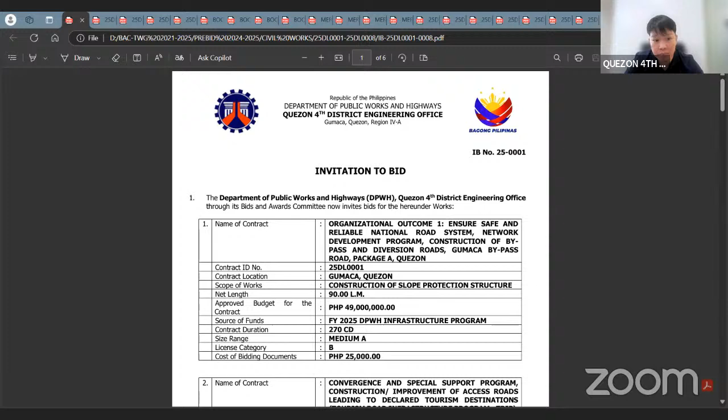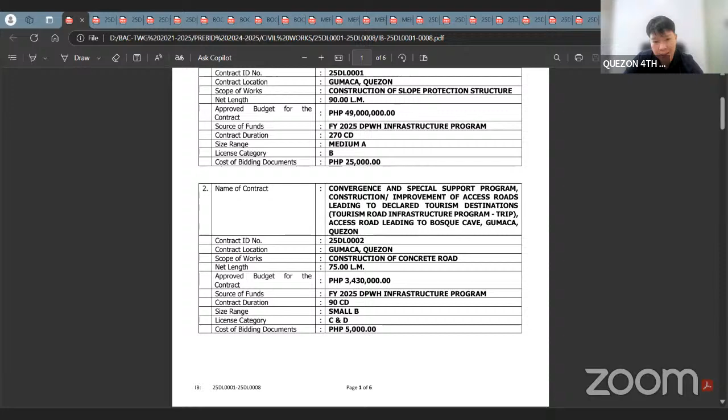For second project, 25DL0002, Convergence Special Support Programs, Construction Improvement Access Road leading to declared tourism destinations, Tourism Road Infrastructure Program Trip, Access Road leading to Bosque Cave, Gumaca, Quezon. Scope of work po natin is construction concrete road, length of 75 linear meters, approved budget for the contract of 3,430,000 pesos. Source of fund, FY 2025 DPWH Infrastructure Program, duration of 90 calendar days, size range small b, license category C and D, and cost of bidding document of 5,000 pesos.

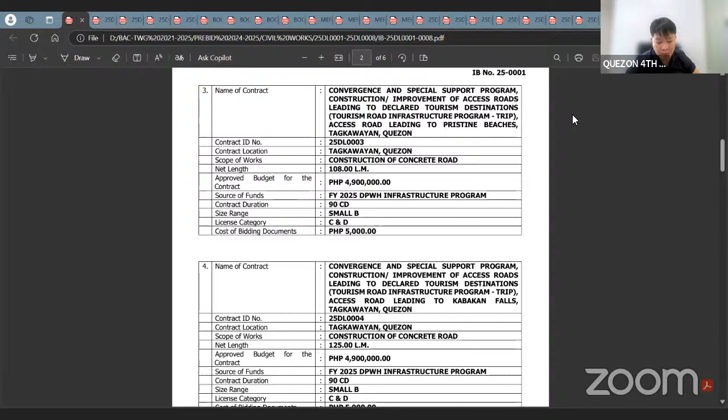Third project, Contract ID 25DL0003, Convergence Special Support Program, Construction Improvement Access Roads leading to declared tourism destinations, Tourism Road Infrastructure Program Trip, Access Road leading to pristine beaches, Tagkawayan, Quezon. Scope of work po natin is construction concrete road, length of 108 linear meters, approved budget for the contract of 4,900,000 pesos. Source of fund, FY 2025 DPWH Infrastructure Program, duration of 90 calendar days, size range small b, license category C and D, and cost of bidding document of 5,000 pesos.

Number 4, Contract ID 25DL0004, Convergence and Special Support Program, Construction Improvement of Access Road leading to declared tourism destinations, Tourism Road Infrastructure Program Trip, Access Road leading to Kabakan, Kabakan Falls, Tagkawayan, Quezon. Length of 125 linear meters, approved for the contract of 4,900,000 pesos. Source of fund, FY 2025 DPWH Infrastructure Program, size range small b. Contract duration po natin is 90 calendar days. License category C and D, and cost of bidding document of 5,000 pesos.

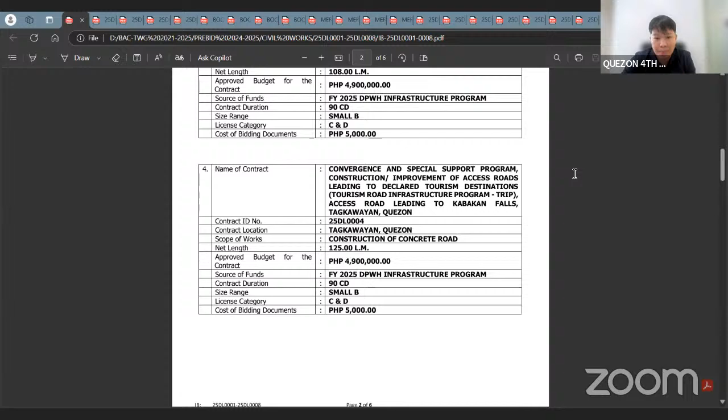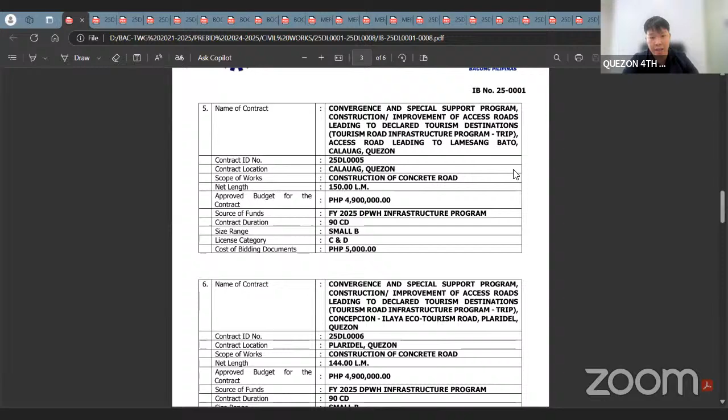Next, fifth project, contract ID 25DL0005, Convergence Special Support Program, construction improvement of access roads leading to declared tourism destinations, Tourism Road Infrastructure Program Trip, access road leading to Lamesang Bato, Calauag, Quezon. Location: Calauag, Quezon, scope of work: construction concrete road, length of 150 linear meters, approved budget for the contract of 4,900,000 pesos. Source of fund, FY 2025 DPWH Infrastructure Program, duration of 90 calendar days, size range small b, license category C and D, and cost of bidding document of 5,000 pesos.

Number 6, Contract ID 25DL0006, Convergence Special Support Program, Construction Improvement Access Roads leading to declared tourism destination, Access Road, Tourism Road Infrastructure Program Trip, Concepcion Ilaya Ecotourism Road, Plaridel, Quezon. Scope of work, construction concrete road, length of 144 linear meters, budget for the contract of 4,900,000 pesos. Source of fund, FY 2025 DPWH Infrastructure Program, duration of 90 calendar days, size range small b, license category C and D, and cost of bidding document of 5,000 pesos.

Next, number 7, Contract ID 25DL0007, Convergence Special Support Program, Basic Infrastructure Program, DIP Multipurpose Building, Facilities to Support Social Services, completion of multipurpose building, Barangay Villa Belen, Quezon. Scope of work, construction of multipurpose building, number of building 1, approved budget for the contract of 2,970,000 pesos. Source of fund, FY 2025 DPWH Infrastructure Program, duration of 120 calendar days, size range small b, license category C and D, and cost of bidding document of 5,000 pesos.

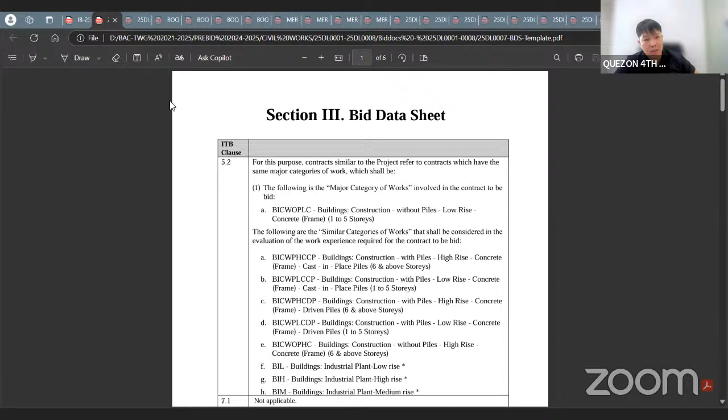Next, last contract ID 25DL0008 for the construction of bridge. For the major category support: bridge construction, concrete superstructure with cast-in-place piles. Then for the similar category support: bridge rehabilitation, concrete superstructure with cast-in-place piles; bridge retrofitting, concrete superstructure with cast-in-place piles.

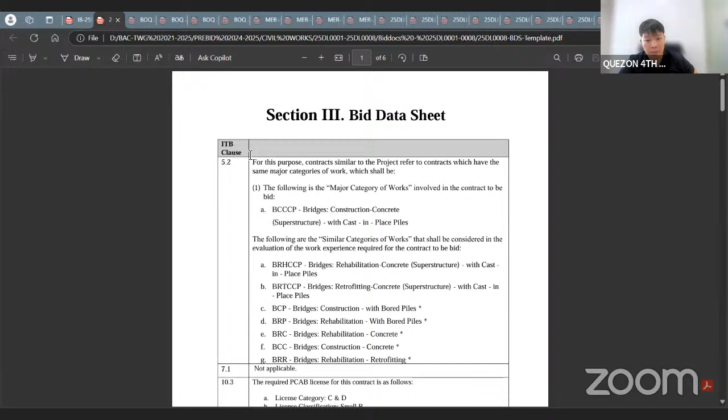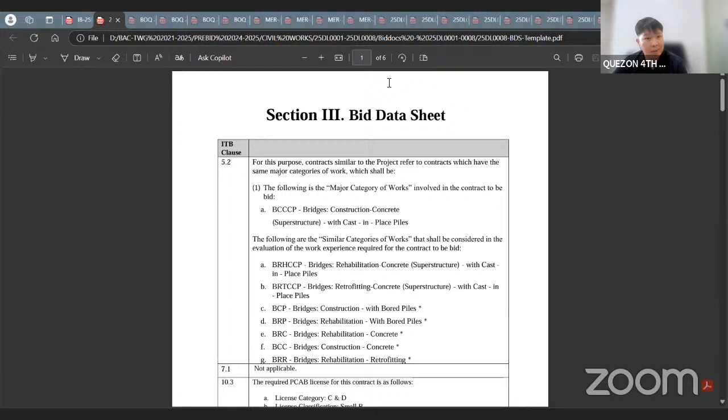Bridge construction with bored piles, bridge rehabilitation with bored piles, bridge rehabilitation concrete, bridge construction concrete, and bridge rehabilitation retrofitting. So that is for 25DL0008. Then next, let's proceed to our bill of quantities.

So for the construction slope protection structure, 25DL0001, for the summary of bid prices: Part A, facilities for the engineer; Part B, other general requirements; C, earthwork; D, sub-base course; then E for the surface course; G, drainage and slope protection structure; and Part LB-B, bank and slope protection works.

So for Part A, we have facilities for the engineer: provision of field office on an incidental basis, provision of furnitures, fixtures, equipment, and appliances for the field office for the engineer, provision for pickup type service vehicle on an incidental basis, provision of progress photograph.

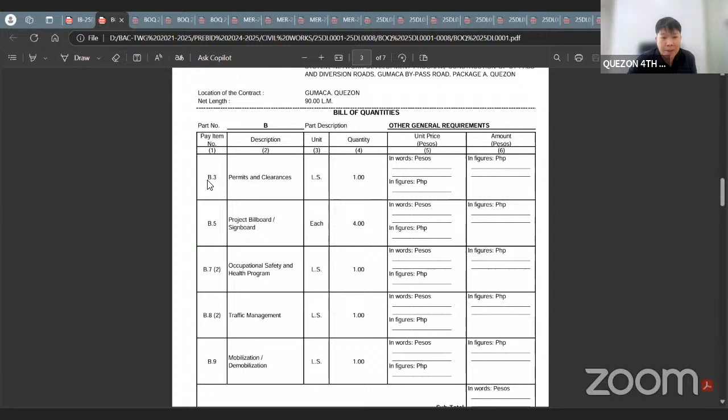Then Part B: permits and clearances, project billboard signboard, occupational safety and health program, traffic management, mobilization, and demobilization. Then for Part C, for the earthworks, we have clearing and grubbing, embankment from roadways, structure excavation common soil, embankment from borrow common soil, subgrade preparation common material. The next, Part D, sub-base course, we have aggregate sub-base course.

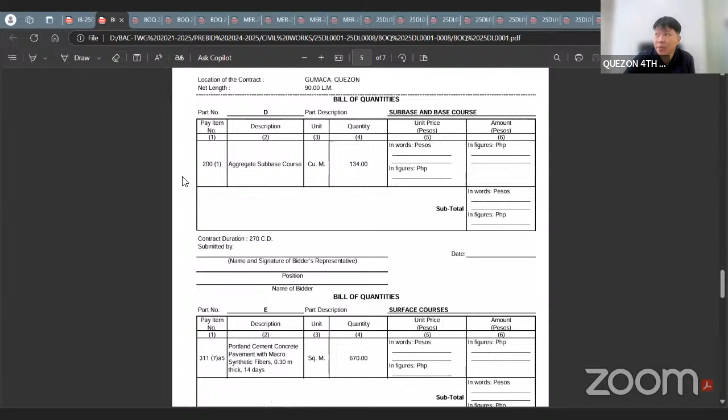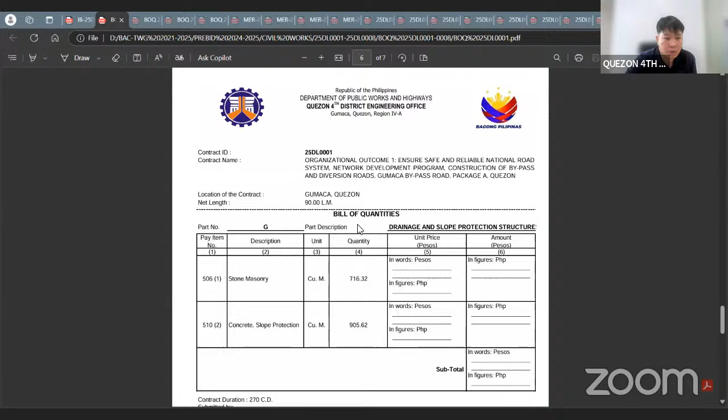Then Part E, for the surface course: Portland cement concrete pavement, macro synthetic fiber, 0.30 meter thick, 14 days. Next item, for the drainage and slope protection structure, this is our major item: Part G, stone masonry and concrete slope protection. Then for bank and slope protection works, Part LB: structural steel sheet piles furnished and structural steel sheet piles driven. So that is for contract ID 25DL0001.

Next, for the construction of concrete road, we have 5 roads. The requirements in the BOQ will be the same; they will only differ in quantity and in the length of our concrete roads.

So for our sample, 25DL0006: Part A, facilities for the engineer; Part B, other general requirements; C, earthwork; D, sub-base course; E for the surface course; and G for the drainage and slope protection structures.

So for the contract IDs 25DL0002, 25DL0003, 25DL0004, 25DL0005, and 25DL0006 — 5 constructions of concrete roads.

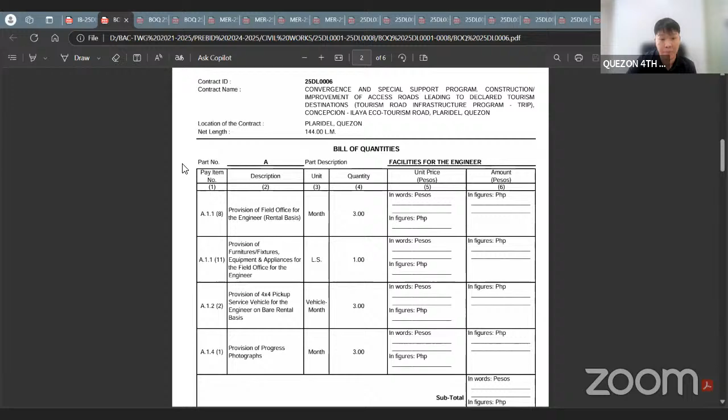For the bill of quantities, Part A, facilities for the engineer: provision of field office on a rental basis, provision of furniture, fixtures, equipment, and appliances for the field office for the engineer, and provision for pickup type service vehicle on a rental basis. Then next, provision of progress photograph.

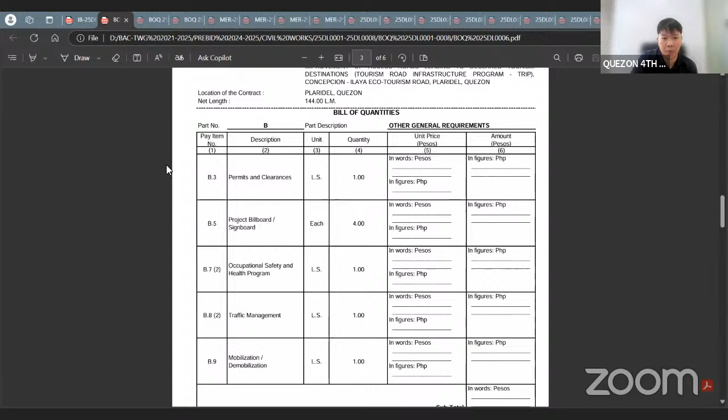Then Part B, for other general requirements: permits and clearances, project billboard signboard, occupational safety and health program, traffic management, and mobilization, demobilization. Then Part C for the earthworks: clearing, grubbing, embankment from roadway, structure excavation common soil, embankment from borrow common soil, and subgrade preparation common material.

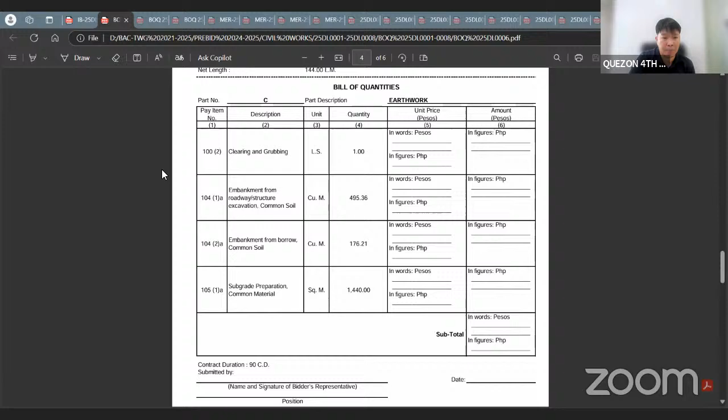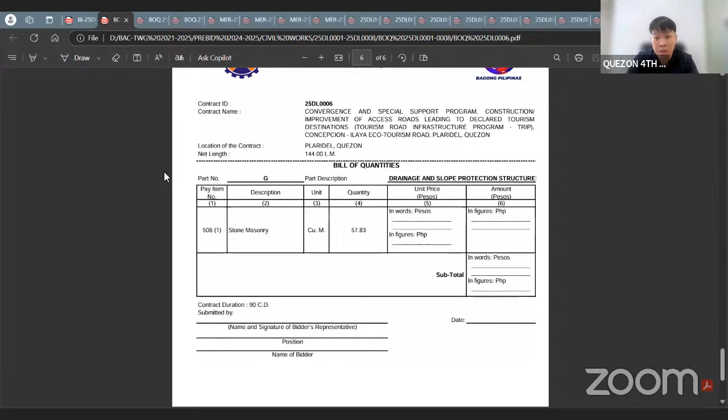Then for Part D, for the sub-base course, we have polymer stabilized sub-base surface course. Then Part E for the surface course: Portland cement concrete pavement, unreinforced, 0.23 meter thick, 14 days. As I mentioned, those 5 contract IDs will have changes in thickness as indicated per contract ID, but for our major categories, the required scope of works is the same. Then Part G for the drainage and slope protection structures, stone masonry.

Next project po tayo, for the multipurpose building, contract ID 25DL0007. For the summary bid prices: Part A, facilities for the engineer; Part B, other general requirements; Part D, reinforced concrete; and Part E, finishing and other civil works.

For Part A, we have provision of office on rental basis, provision of furniture, fixtures, equipment and appliances for the field office for the engineer, provision of 4x4 pickup type service vehicle for the engineer on rental basis, and provision of progress photograph.

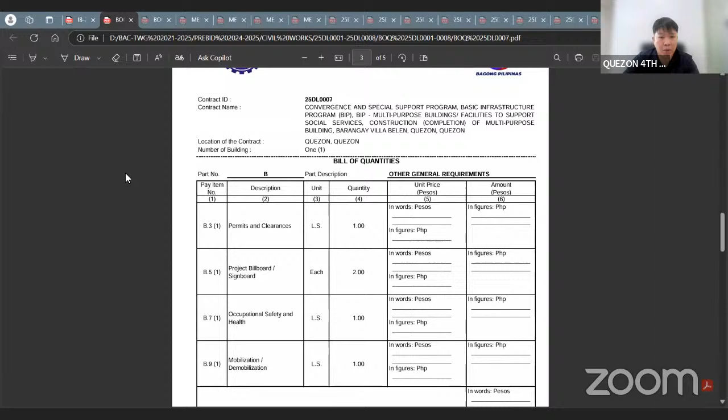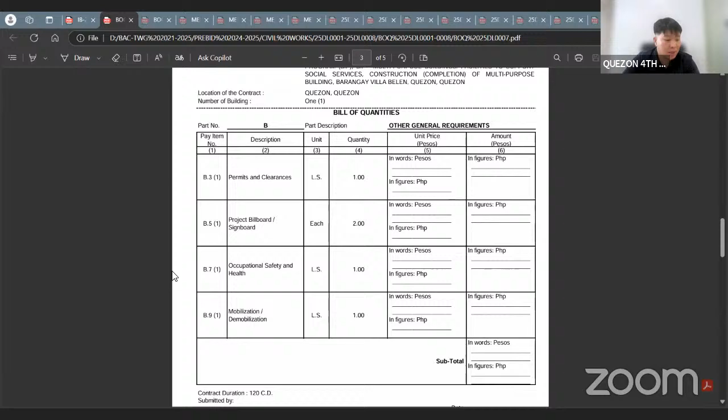For Part B, other general requirements: permits and clearances, project billboard, signboard, safety and health program, mobilization, demobilization. Then Part D for reinforced concrete, forms and falseworks.

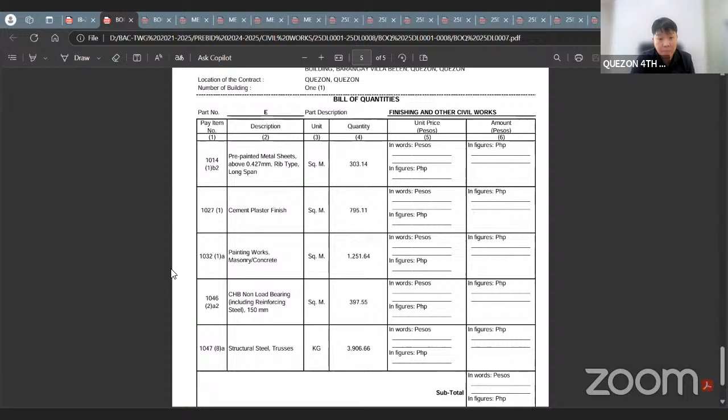Part E, finishing and other civil works: pre-painted metal sheet above 0.427mm, rib type, long span; cement plaster finish; painting works; masonry concrete; CHB non-load bearing including reinforcing steel, 150 millimeters; structural steel trusses.

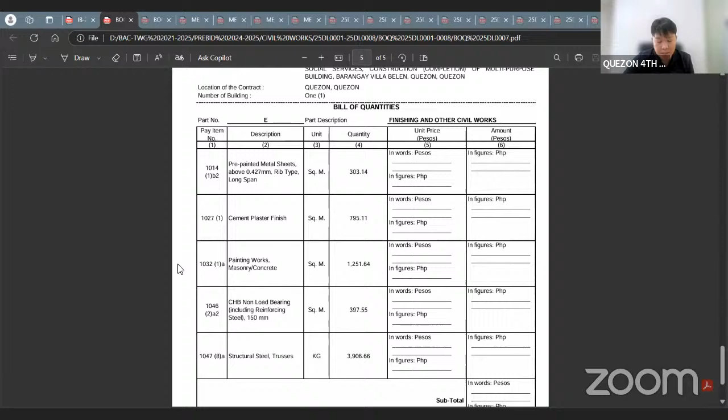So yun lang po yung ating required items for 25DL0007, construction of multipurpose building. Next.

Last project, or last contract ID natin, that is for the construction of bridge, contract ID 25DL0008. For the summary bid prices: Part A, facilities for the engineer; Part B, other general requirements; Part F for the bridge construction; and Part G for the drainage and slope protection structure.

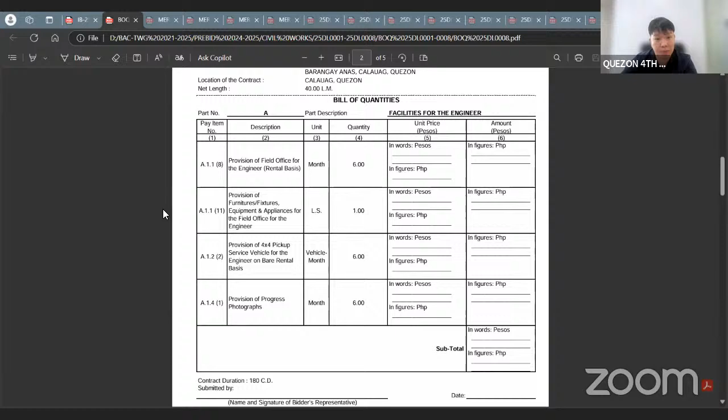Part A: provision of office on rental basis, provision of furniture, fixtures, equipment and appliances for the field office for the engineer, provision of 4x4 pickup type service vehicle on rental basis, and provision of progress photograph.

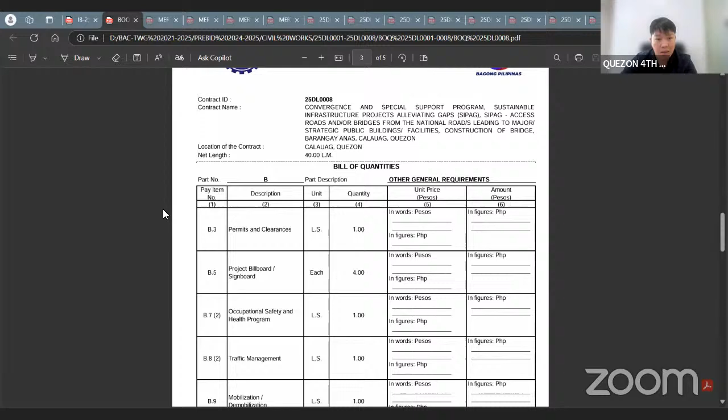Next, Part B, other general requirements: permits and clearances, project billboard, signboard, safety and health program, traffic management, mobilization, demobilization. Then Part F for the bridge construction.

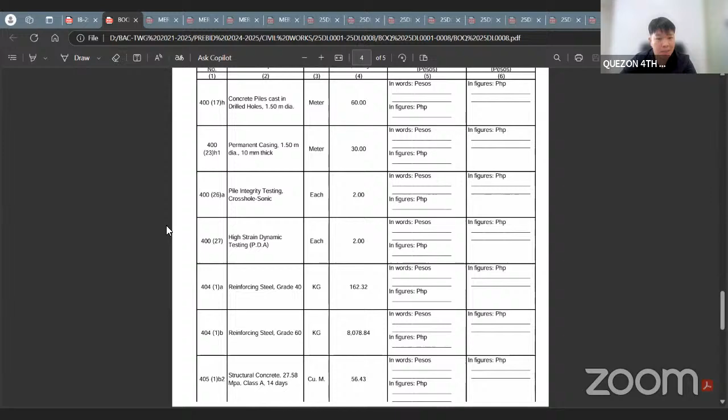Concrete pile cast in drilled holes, 1.5 meter diameter, permanent casing 1.5 meter diameter, 10 millimeter thick; pile integrity testing; cross-hole sonic logging; high strain dynamic testing (PDA); reinforcing steel grade 40; reinforcing steel grade 60; structural concrete, 27.58 megapascal, Class A, 14 days.

Then for the drainage and slope protection structure, Part G, stone masonry. So, tapos na ba tayo sa BOQ?

Proceed po tayo sa minimum equipment requirements. For the construction of slope protection structures, required po natin: backhoe, bar bender, bar cutter, bulldozer, concrete saw, concrete screeder, concrete vibrator, cutting outfit, dump truck, generator set, motorized road grader, one bagger mixer, payloader, sealer joint diesel driven with hot cold spray nozzle, service vehicle, stake truck, trailer low bed with truck tractor, truck mounted crane with bucket, vibratory roller, vibro hammer, water truck pump, welding machine, minor tools, and minimum testing equipment as per DEO 11 series of 2017.

That is for slope protection structure, 25DL0001.

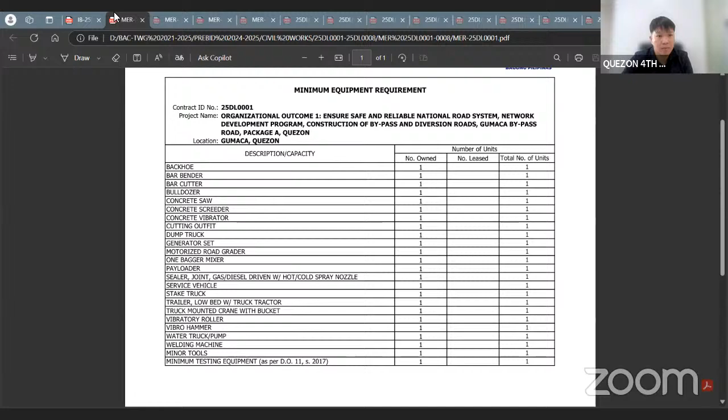Next, required equipment natin for the construction of concrete roads. Pare-pareho lang po yung ating 5 projects sa roads: 25DL0002, 25DL0003, 25DL0004, 25DL0005, and 25DL0006. So required equipment...

Backhoe, bar cutter, bulldozer, concrete saw, concrete screeder, concrete vibrator, dump truck, motorized road grader, one bagger mixer, payloader, sealer joint gas/diesel driven with hot cold spray nozzle, service vehicle, stake truck, trailer low bed with truck tractor, vibratory roller, water truck pump, minor tools, and minimum testing equipment as per D.O. 11 series of 2017.

Then next, for the minimum equipment requirement ng ating multipurpose building, 25DL0007: bar bender, bar cutter, cargo truck, crane, one bagger mixer, plate compactor, service vehicle, trailer low bed with truck tractor, welding machine, minor tools, and minimum testing equipment as per D.O. 11 series of 2017.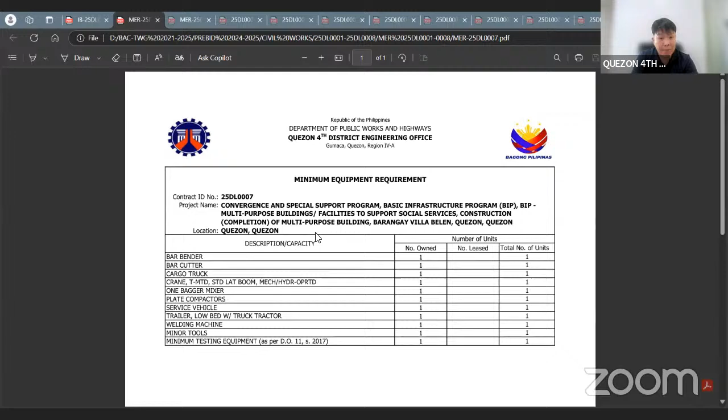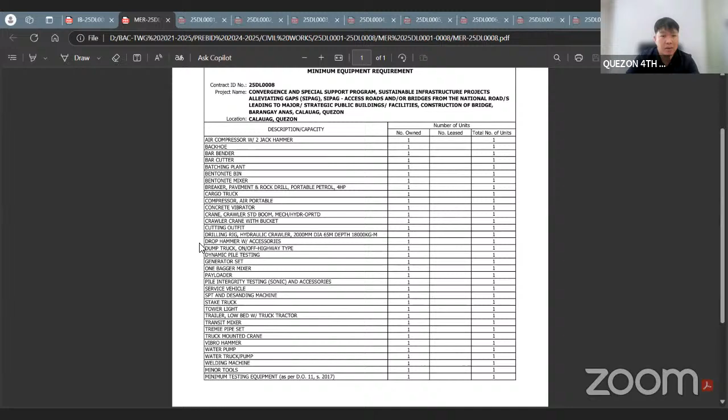Then last, contract ID na rin, for 25DL0008, required equipment: air compressor with 2 jackhammers, backhoe, bar bender, bar cutter, batching plant, bentonite bin, bentonite mixer, breaker pavement and rock drill portable petrol 4 horsepower, cargo truck, air compressor portable, concrete vibrator, crane, crane crawler with bucket, cutting outfit, drilling rig, drop hammer, dump truck.

Dynamic pile testing, generator set, one bagger mixer, payloader, pile integrity testing sonic and accessories, service vehicle, SPT and desanding machine, stake truck, tower light crane, trailer low bed with truck tractor, transit mixer, tremie pipe set, truck mounted crane, vibro hammer, water pump, water truck pump, welding machine, minor tools, and minimum test equipment as per D.O. 11 series of 2017.

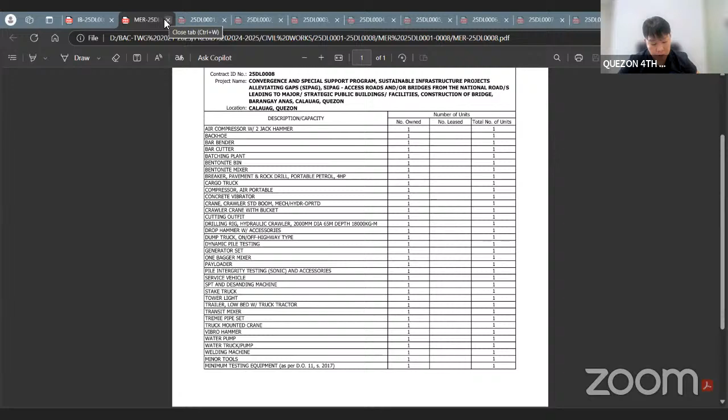Okay, so for the minimum test equipment, next po natin is for the plans. For 25DL0001, yung plan po natin for the construction of bypass diversion road, Gumaca Bypass Road, Package A, Gumaca Quezon, station 0006+497 to station 0006+697, length of 200 linear meters.

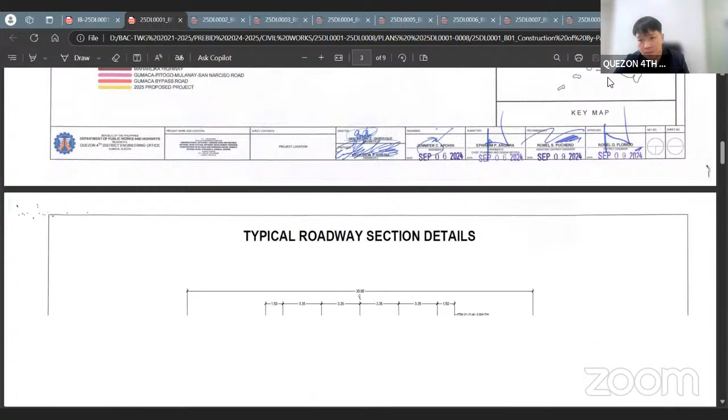Okay, next for 25DL0002, access road leading to Bosque Cave, Gumaca Quezon, length of 75 linear meters.

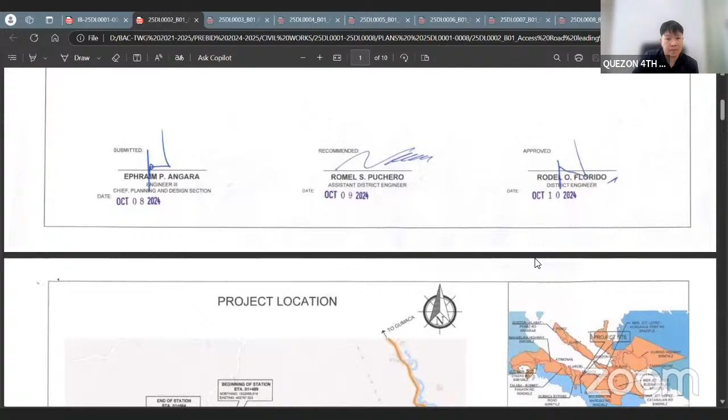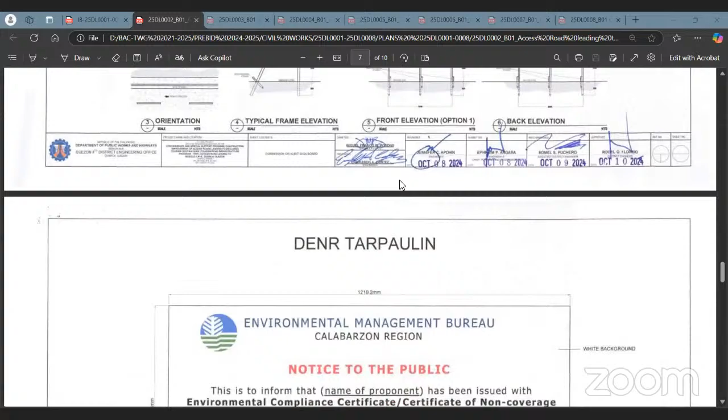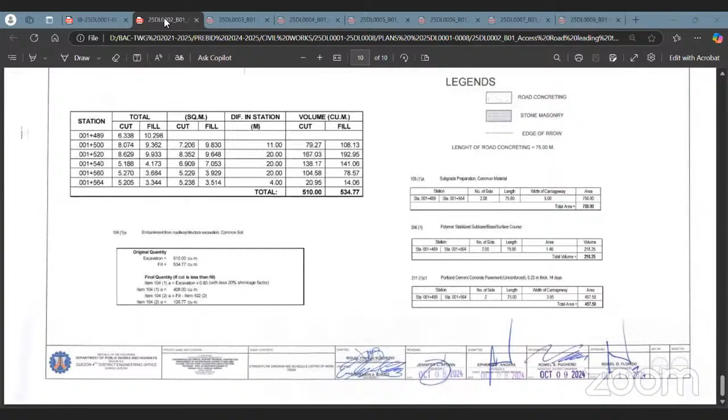Then next, for contract ID 25DL0003, access road leading to Pristine Beaches, Tagkawayan Quezon, length of 108 linear meters.

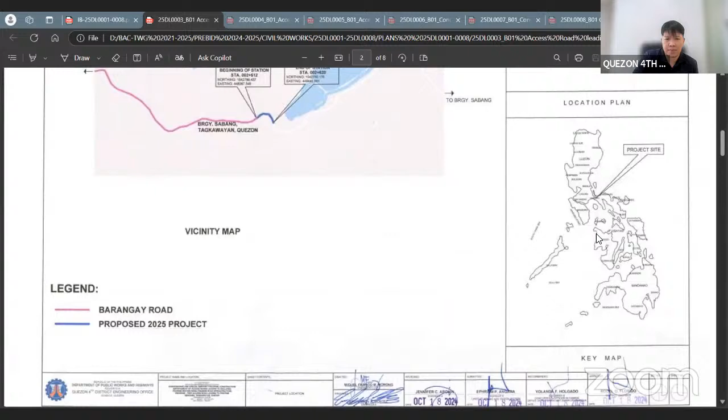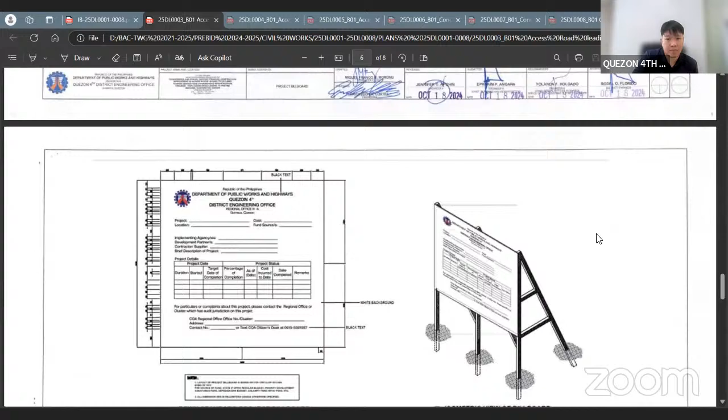Access road leading to Kabakan Falls, Tagkawayan Quezon, length of 125 linear meters.

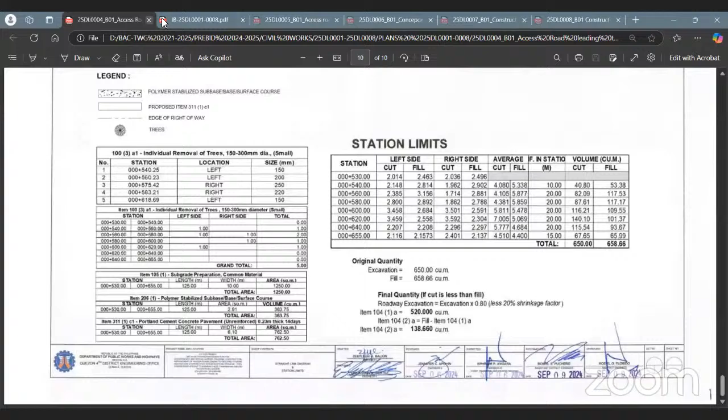Next, contract ID 25DL0005, access road leading to Lamesang Bato, Calauag, Quezon, length of 150 linear meters.

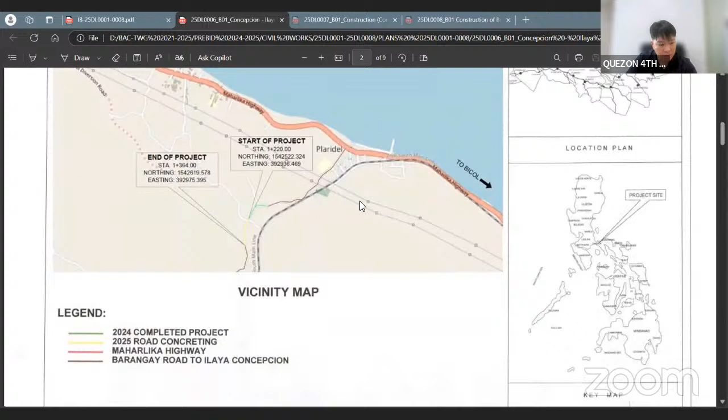Then 25DL0006, Tourism Road, Concepcion, Ilaya Ecotourism Road, Plaridel, Quezon, length of 144 linear meters.

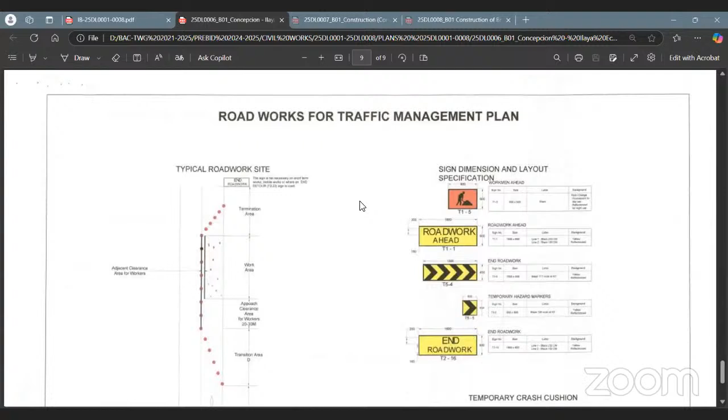Then 25DL0007, multipurpose building, Barangay Villa Belen, Quezon, Quezon.

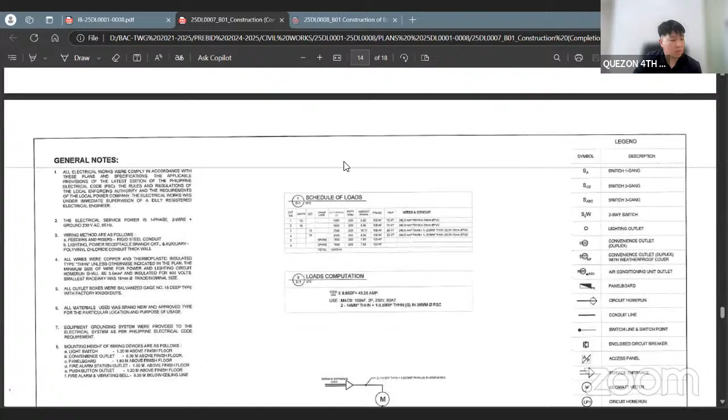Okay, next. Last contract ID 25DL0008, construction of bridge, Barangay Anas, Calauag, Quezon, length of 40 linear meters.

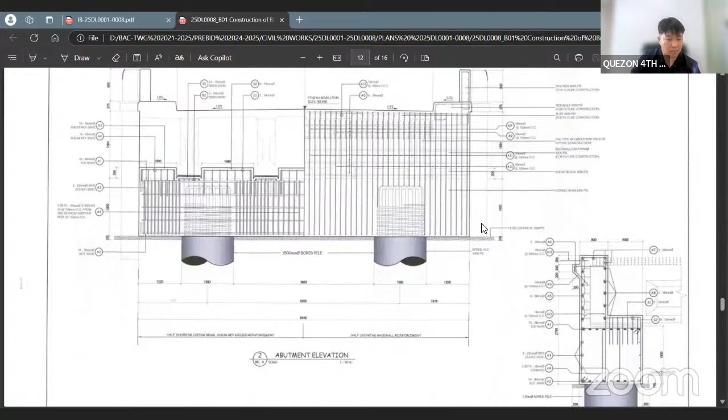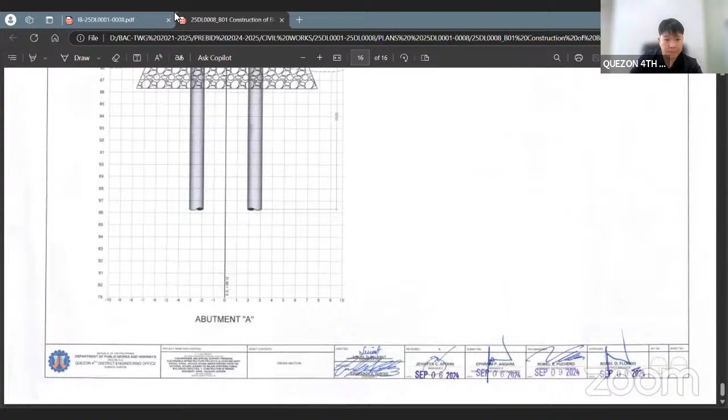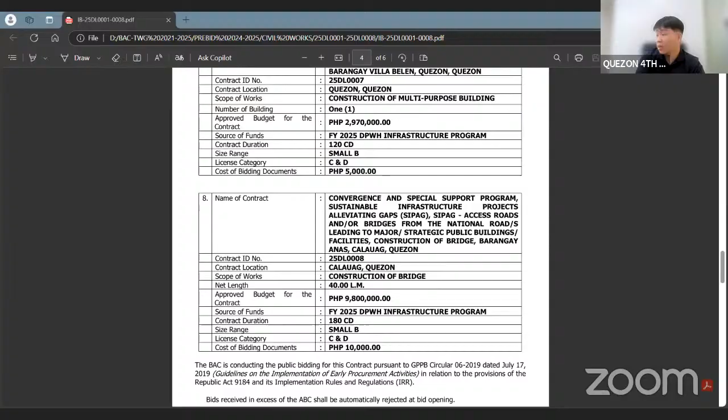Okay, let's proceed to other matters. For the other matters, number 1: all notarized documents should be attached with documentary stamps. Any missing document is grounds for outright rejection of bid. Use the specified form and paper size for the bidding documents.

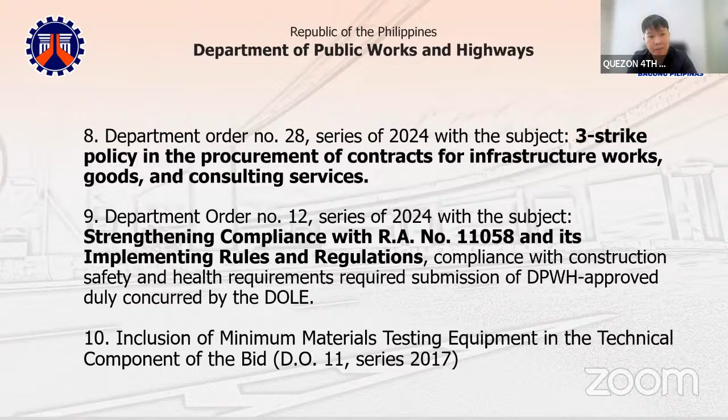Number 10, inclusion of minimum materials testing equipment in the technical component of bids under DO 11 Series of 2017. Next is the Mayor's Permit as part of the eligibility requirements. Then Department Order 133 Series of 2015 for the Precedence Diagram Method. Department Order 105 Series 2020 and Department Order 6 Series of 2024.

For transparency and accountability of the procurement process, we are live streaming on our DPWH Quezon 4th DEO YouTube channel. For bidders and BAC members who want to participate online, please notify the office so we can provide you with a Zoom link.

As mentioned earlier, this is under GPPB Circular 06 Series 2019 for the implementation of early procurement activity. All 8 of our projects are through EPA.

Department Order 87 Series 2020 for the electronic submission and receipt of bids. Please follow the guidelines if preparing to drop or submit bids via electronic bids.

Number 16, without prejudice to the provisions of RA 3019 and other penal laws, penalties and offenses cover all types of procurement, whether done manually or electronically, pursuant to Rule 21, Penal Clause, Section 65, Offenses and Penalties of the 2016 Revised Implementing Rules and Regulations of RA 9184.

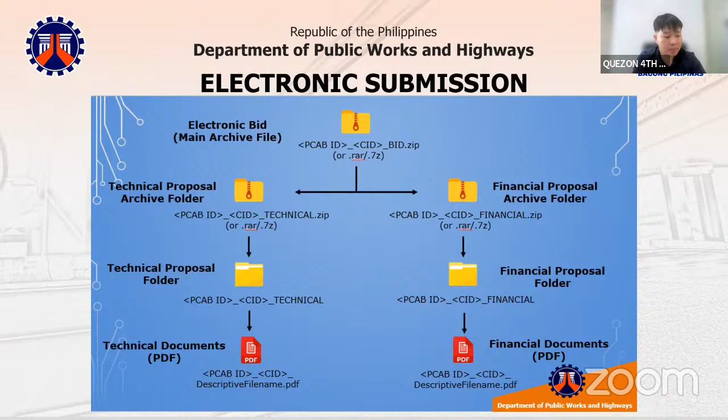Advisory to our valued clients: this office is still implementing a no appointment, no entry policy. Clients including bidders must schedule their visit at this address and submit the office form to the office concerned at least one day before the scheduled meeting, through email address pakisonfort@deo.yahoo.com.ph. Forms or visitor's passes will also be provided at the front desk guard for walk-in clients, but entry will still depend on the approval of the office concerned.

The Department of Public Works and Highways, Quezon 4th District Engineering Office, reserves the right to reject any or all bids, and declare a failure of bidding prior to contract award, in accordance with Section 35 and 41 of the 2016 Revised Implementing Rules and Regulations of RA 9184, without thereby incurring any liability to affected bidder or bidders. Any other questions?